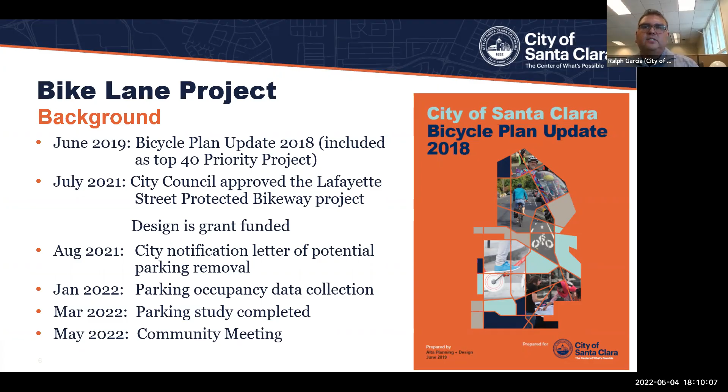So as I mentioned, the project is part of the priority projects in the 2018 bike plan. This is a portion of Lafayette Street that connects from Reed up to Laurelwood. It's identified as a separated class 4 facility in the bike plan, but it does require the removal of parking from Memorex Drive to Parker Street, and that's kind of what we'll be discussing about the parking study.

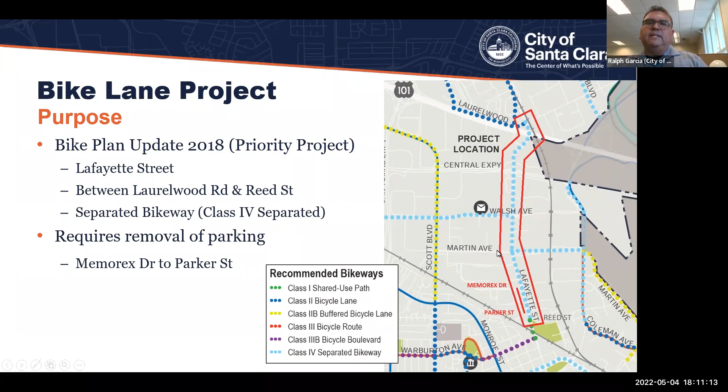So if you look at the map, you can see in red Memorex Drive and Parker Street, and that one segment is where we're talking about removing parking. Another thing to point out is that basically from Reed all the way up north to the Bay Trail is where we'll have a completed bike network if we can get all the projects implemented.

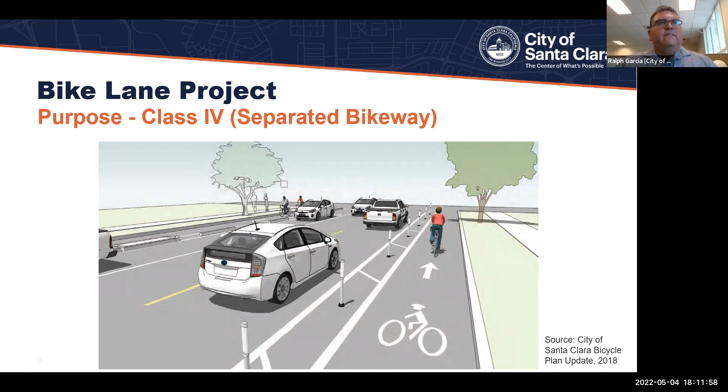So this is our study area for the parking analysis. As I mentioned, from Memorex Drive to Parker Street or Court is where we're looking to eliminate parking on the west side of Lafayette Street.

We also looked at surrounding on-street parking uses to determine if parking was prohibited on those segments, and if nearby streets can accommodate that parking. So on the screen, we also studied Memorex Drive, Shulman Avenue, Ronald Street, Avila Avenue, Di Giulio Avenue, and Parker, as I mentioned.

The data collection was earlier this year in January. We looked at the peak times, Tuesday through Thursday. The peak time for parking is usually either midday morning, if it's a business area, or overnight if it's more residential. This area has both components, so we looked at both time slots.

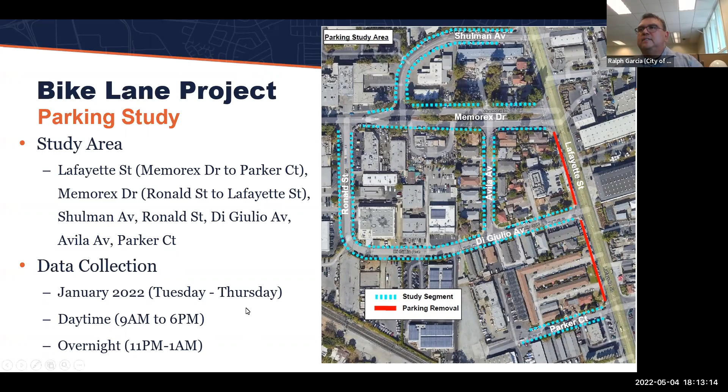So then we also looked at weekday overnight. As I mentioned, this is mostly where you'd find the peak for residential parking, when everyone's home at night, from 11 p.m. to 1 a.m., basically overnight.

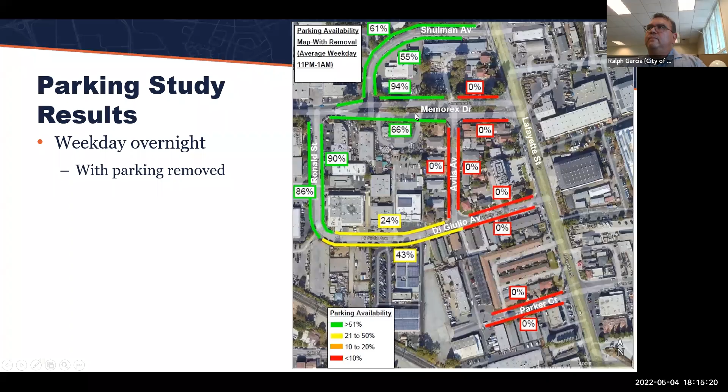This is removal of parking on the west side of Lafayette Street. I should mention that parking is only allowed on the west side of Lafayette Street in this segment.

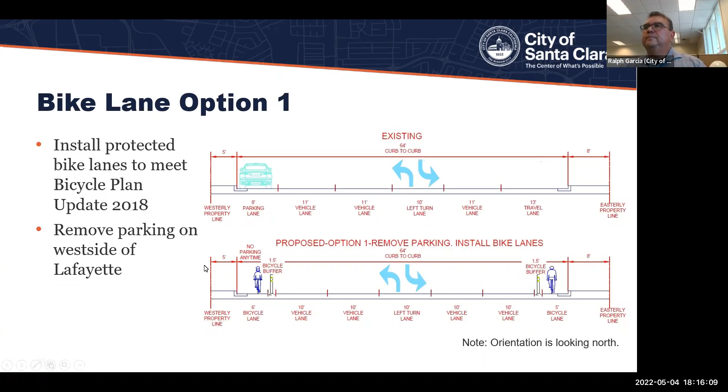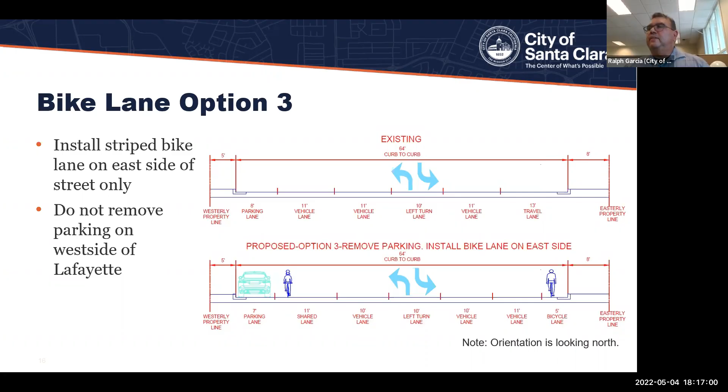The third option, we keep the parking but put the bike lane on the east side, and on the west side, next to the parked vehicles, there wouldn't be any bike facilities. It would just be a mixed flow lane with cars and bicyclists sharing the same lane.

So now it's time for our poll question. What is your preference? As a reminder, option 1 is removal of the parking and adding buffered bike lanes with flexible posts or some sort of delineator. Option 2 is do not remove the parking, but install the bike lane on the west side of the street only. Option 3 is to keep the parking and install the bike lane on the east side of the street. The fourth option is no project at all.

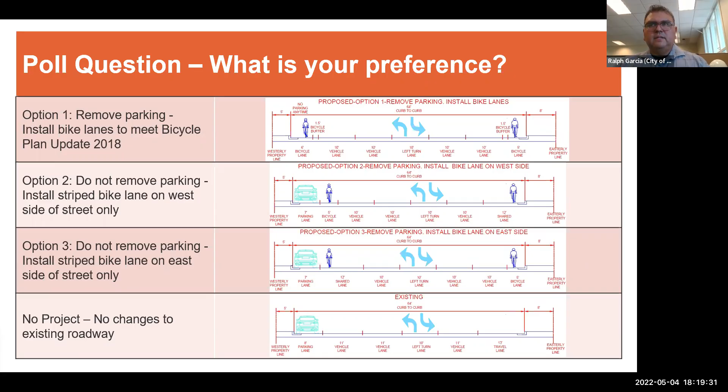So that was our bike project. This is a pedestrian improvement project, going along in that same area for Lafayette Street and Parker Street. We have identified this as an improvement project for pedestrians crossing Lafayette Street.

Right now there's an uncontrolled crossing. You can see in the aerial image on the north side of the intersection, and the other two images show the street level view. It doesn't have a lot of pedestrian features.

There are signs to let motorists know that there is a crossing, but that is minimal for this type of crossing. There's also a zebra stripe type of crossing, and there's no ramp. So we've identified this as a possible location for improvements.

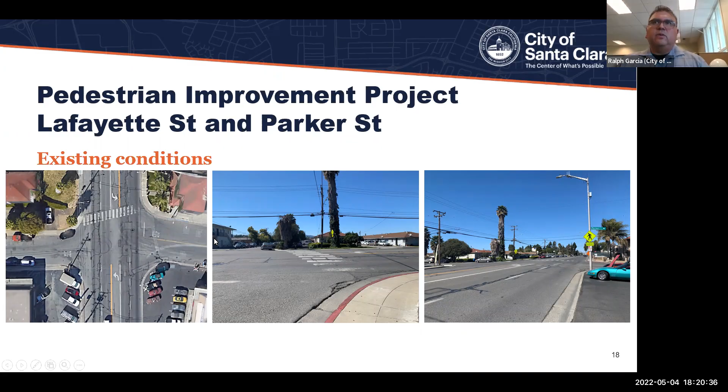One of the improvements we've identified is a HAWK beacon. Basically, a HAWK beacon is like this one on El Camino Real, traveling through Santa Clara close to the Sunnyvale border.

When you see a red light, that tells drivers to stop, and then pedestrians will see a walk symbol, allowing them to cross the street. The flashing red shows during the pedestrian countdown phase, letting drivers know they can proceed once pedestrians have finished crossing. The dark indications are usually off if there's no pedestrian phase activated. So this is something we've identified as an improvement for that area.

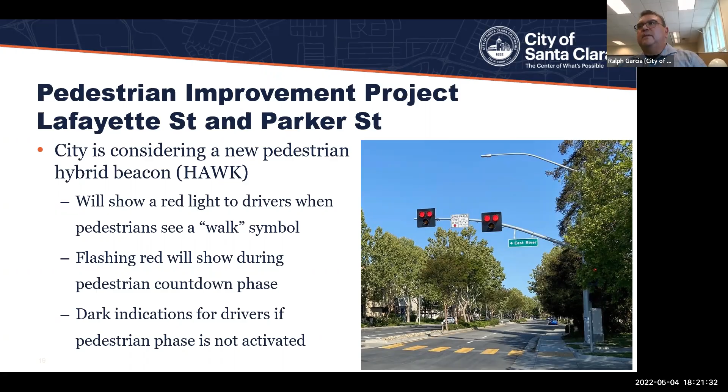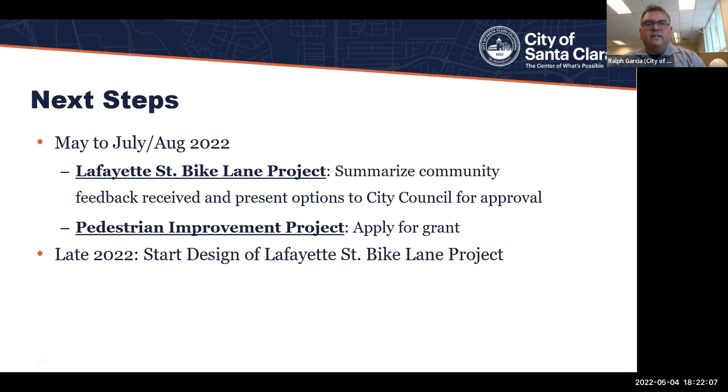Next steps: from May to July this year, we'll summarize any community feedback we've received and provide options to City Council. For the pedestrian improvement project, we'll be applying for grants to see if we can fund the design and construction. Right now we're thinking late 2022 for the start of design on the Lafayette Street bike lane project. Once again, if you have questions or comments, please raise your hand and we'll be happy to answer them.

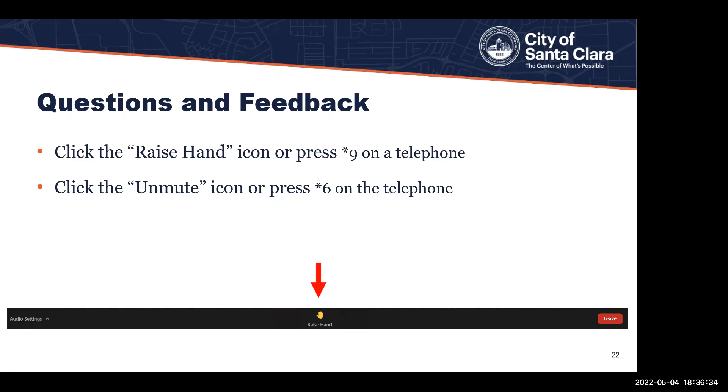My husband's a house husband, and while I can speak from my experience on weekends and evenings, he's here all day, every day. Bike riders? There's no shopping, no good restaurants. People aren't thinking, let's ride down Lafayette for a nice bike ride. So the number of bike riders who physically use, at least this section, is very minimal. I know we're trying to make things safer, which is always a good goal, but many adult bike riders, not those with families, don't even use the overpass — I call it the curly Q — they go underneath where the cars are anyway. That's it.

Thank you very much for your comments. I believe we have a couple of questions in the Q&A. There's a question about how many people are attending and what was done to market this meeting to the neighbors in the area. I believe we have about 5 attendees on this call, and as far as letting residents know, we did send flyers out.

Let's see, maybe Jonathan or someone can let them know how many were sent and what other methods we use to advertise a project. Oh, okay, here we go. There were 400 flyers sent to residents, and we've also sent some social media posts to let residents know about the project.

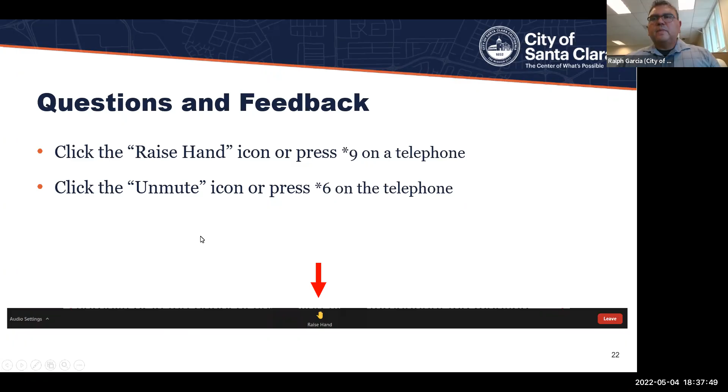Oh Ralph, there's one more question in the Q&A. There's a question about homeowners or business owners on the call. We didn't screen the attendance, so I don't think we have a mix, and I don't think we had that as a poll, but we just allowed everyone to voice their opinion on the project.

And maybe Ralph, if I can add a little more color to the marketing question. We did send, I think Mr. Garcia had mentioned, about 400 or 450 flyers. Those flyers were sent specifically to physical addresses on Lafayette, as well as all the streets within the parking study area. We sent flyers to both physical addresses along those streets, and since the city does have a database, if the listed owner of a property has a different address not in Santa Clara, we also sent flyers to the address listed for the owner, so that both the owner and tenant or occupant or business manager would see the flyer. Hopefully that provides a little more color on that.